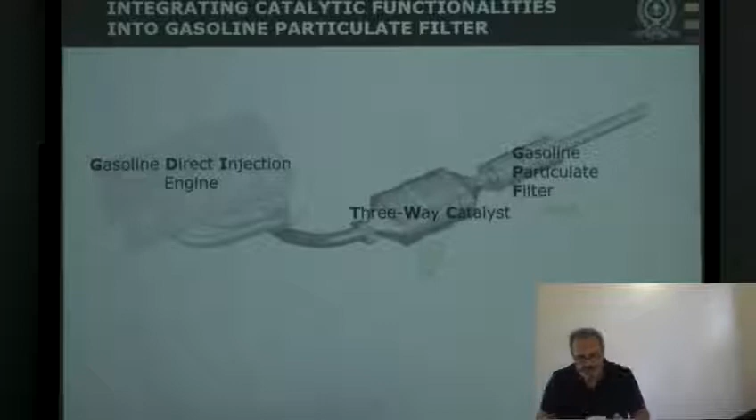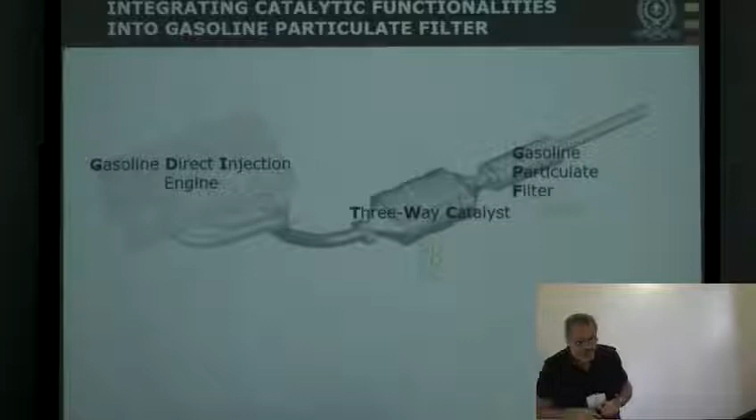The thing that I guess most people don't know, at least I didn't, is that GDI engines produce soot, and they produce soot in greater number than diesel. I said number - if you look in terms of mass, they produce less total mass, but greater number of soot, meaning the particles are even smaller than diesel, in the order of below 100 nanometers. So they are actually more harmful for human and animal health.

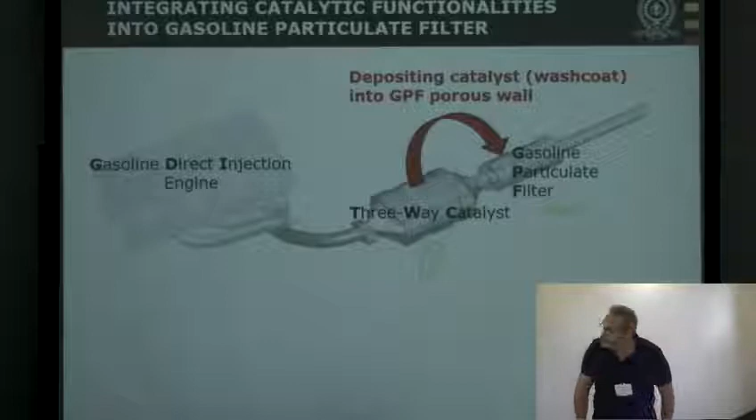So to avoid this, the industry has been designing and putting into the exhaust gas system gasoline particulate filters, like was done for diesel engines. And of course, in front of the gasoline particulate filters, you have the three-way catalyst used to reduce NOx, oxidize CO, and eventually oxidize unburned fuels. But the industry now is trying, for many reasons I'm going to explain, to delocalize the catalysts into the gasoline particulate filters.

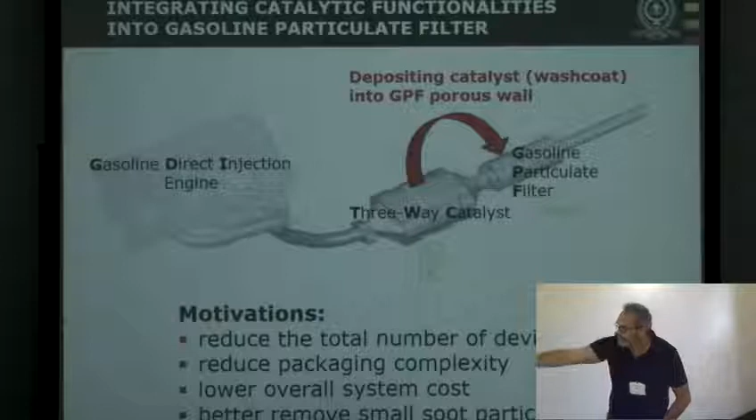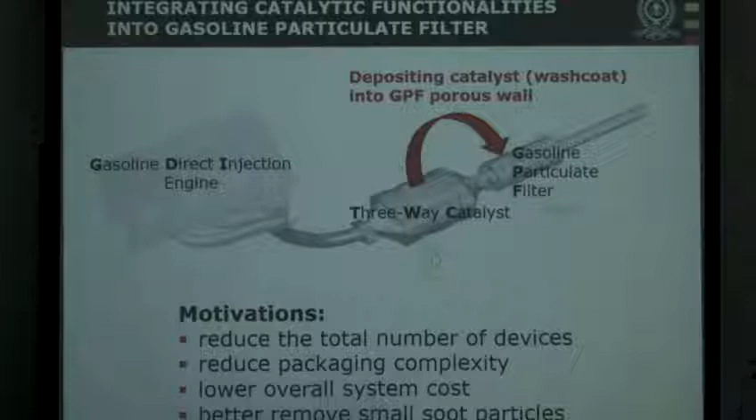So combine the two units for several reasons: reduce the total number of devices in the exhaust after-treatment system, reduce packaging complexity, lower overall system costs, and eventually better remove the small soot particles. That's the context of this work.

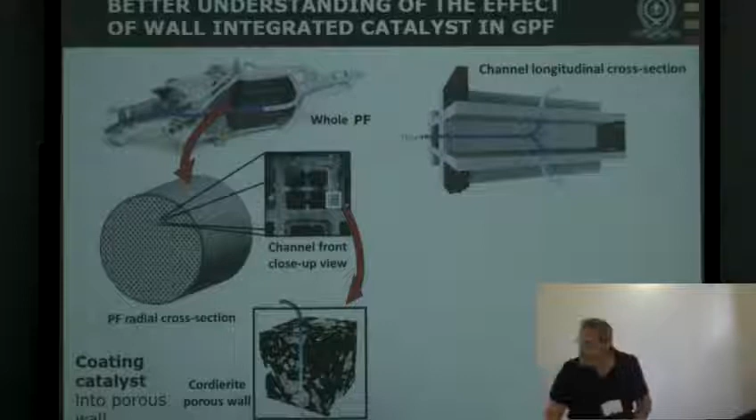We're forcing the flow to go through this cordierite porous wall - cordierite is a ceramic - and the order of magnitude of the pore size of this cordierite is around 20 micrometers, and the thickness of the wall is around 300 micron, to give you an order of magnitude. So the idea is to take the catalyst and embed it into the porous media, the ceramic. But of course they want to do it in the best way possible.

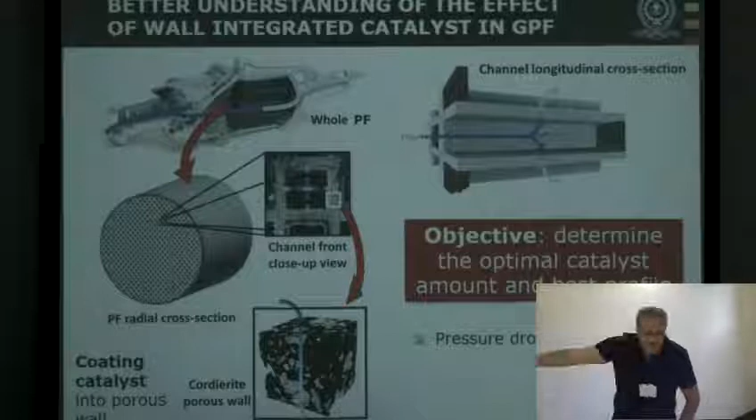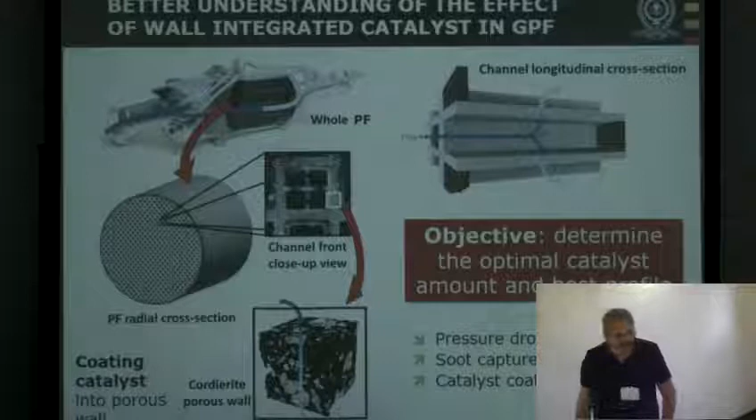So the objectives of Igor's work were to determine the optimal catalyst amount and best distribution within the pore space, to have the lowest pressure drop possible, the best soot capture efficiency, the best catalytic effectiveness, and eventually to reduce cost.

So we devised a four-step numerical methodology for the prediction of the three-way catalyst gasoline particulate filter performance. There are four steps, I'm going to go into detail in the next few slides.

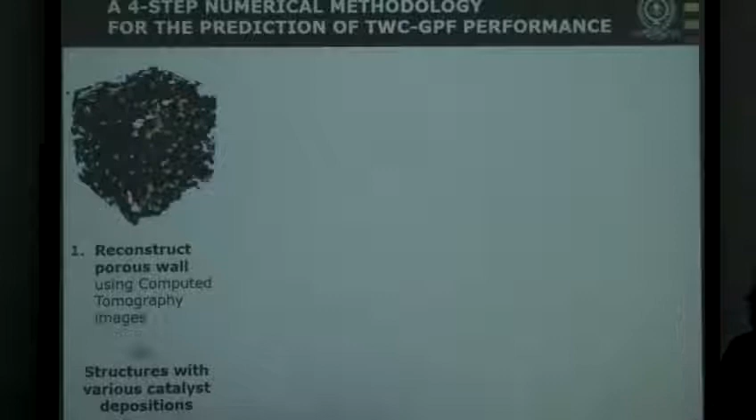So the first step is to reconstruct the porous wall. We're focusing only here - you could think of modeling the entire GPF, but that would be a multi-scale problem, so for the time being we're focusing only on the porous wall, which we reconstruct using computed tomography images.

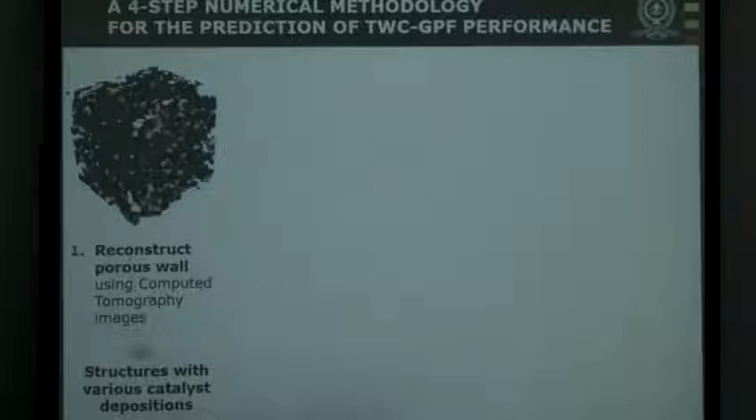The second step is to compute the flow fields using the lattice-Boltzmann method to determine pressure drop or permeability of the porous media. The next step is to compute the aerosol trajectories by solving a Langevin equation to determine the capture efficiency of the porous media.

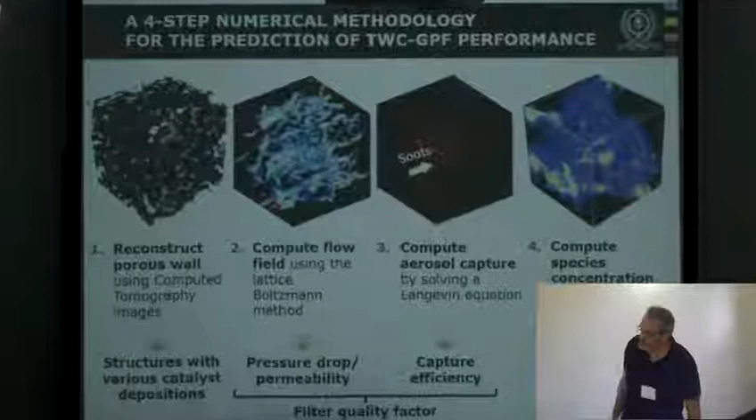And eventually, from the pressure drop and the capture efficiency, you can determine—I'll show you later how this factor is devised—it's a filter quality factor, which is independent of the thickness of the filter. The fourth step now is to compute the concentration of a species within the porous media and determine the catalytic coating effectiveness and/or the conversion of some.

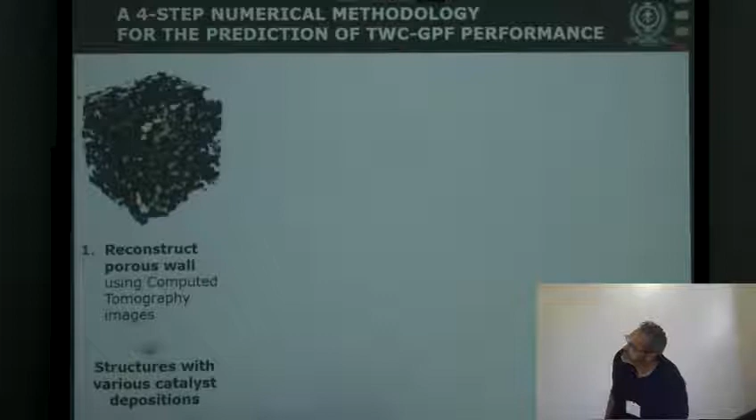So to go into a bit more detail, how do we reconstruct the porous wall? From 2D tomographic images—of course I won't go into details because this as such is the work of a master's thesis or a PhD. We actually have a German guy working on this full time.

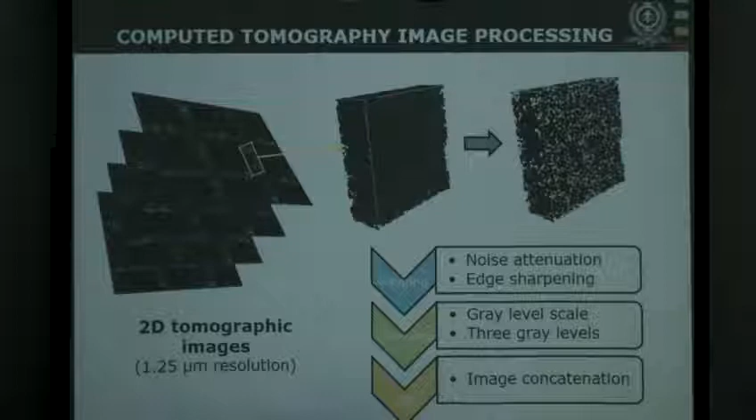So you have to filter the image. The thresholding, as you know, is quite difficult because here we have to threshold three phases: the porous media, the cordierite, and then the catalyst. So this is not—I only have a few slides, just this one on this—but this is such a big endeavor.

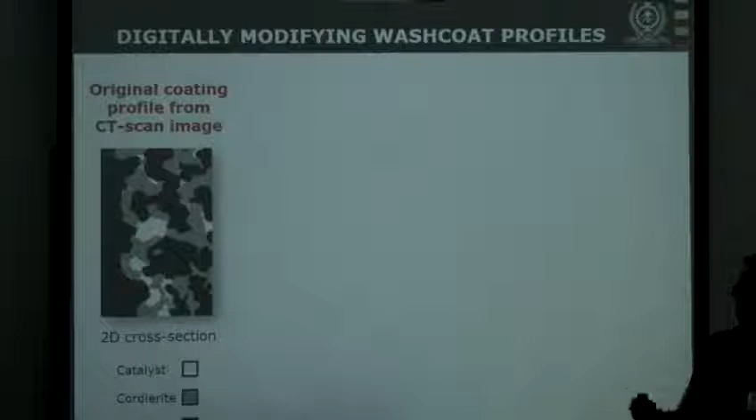Eventually you concatenate the 2D images and you get the 3D structure. So Umicore provided us with some tomographic images of one of the 3-way catalyst GPF converter and filter that they have developed with a certain catalyst deposition inside.

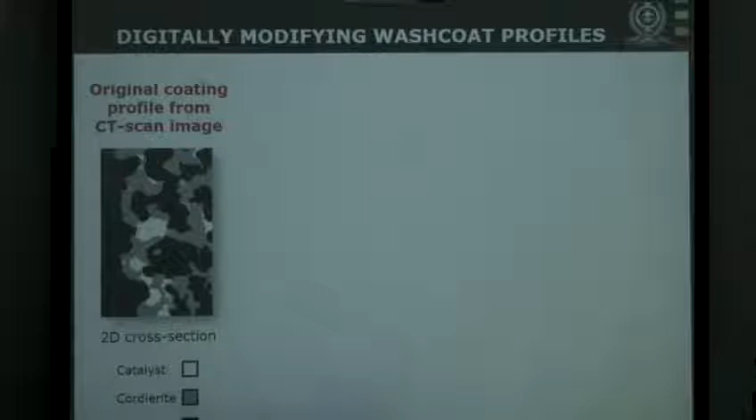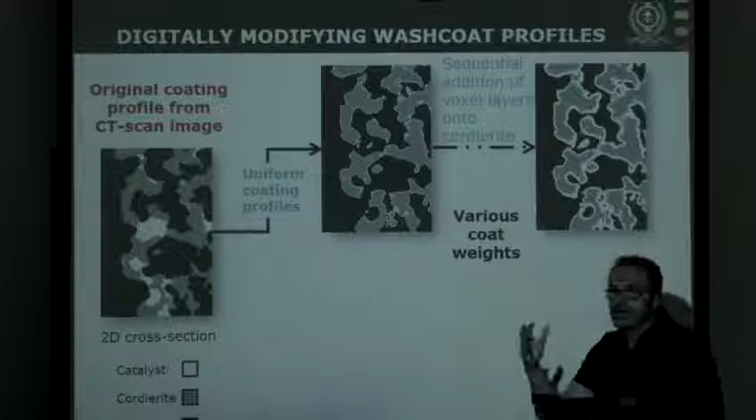And from this image, we are reconstructing several structures where we vary the coat weight, first using a uniform coating deposition, because eventually they wanted to know whether a non-uniform or uniform coating deposition is best to use.

So to deposit uniform coating layers, we simply remove the catalyst here in white, and then we grow layer by layer the catalyst on the cordierite wall, and doing so we can have different coat weights onto the cordierite porous wall.

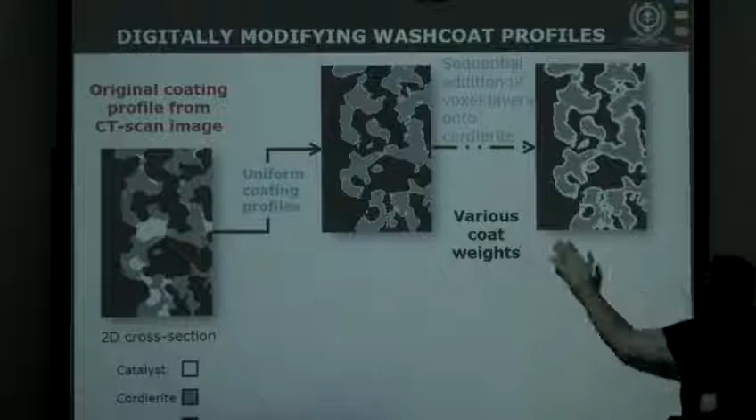The other approach now is to form non-uniform coating profiles at different coat weights. We start from the original image, we erode the catalyst and then we reduce the coat weight, or we dilate the catalyst and increase the coat weight, conserving some kind of non-uniformity in the deposition.

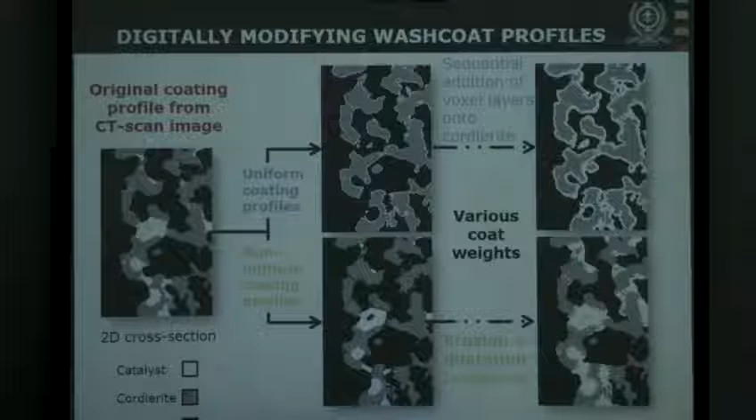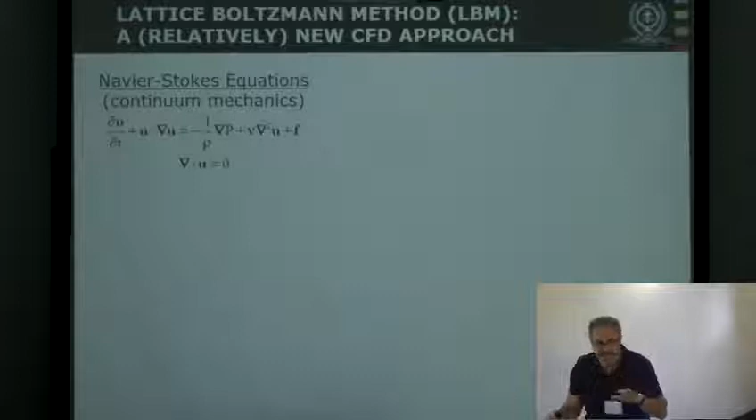So the second step, as I told you, is to compute the fluid flow using the lattice-Boltzmann method. I have this slide just in case some of you may not know exactly the lattice-Boltzmann method. It's relatively—I put it in brackets because it's been around for 20 years—a relatively new CFD approach. Instead of solving the Navier-Stokes equation, you actually start from the Boltzmann equation.

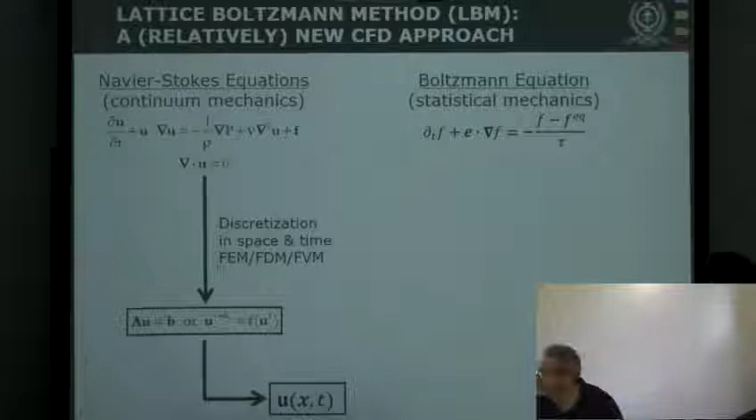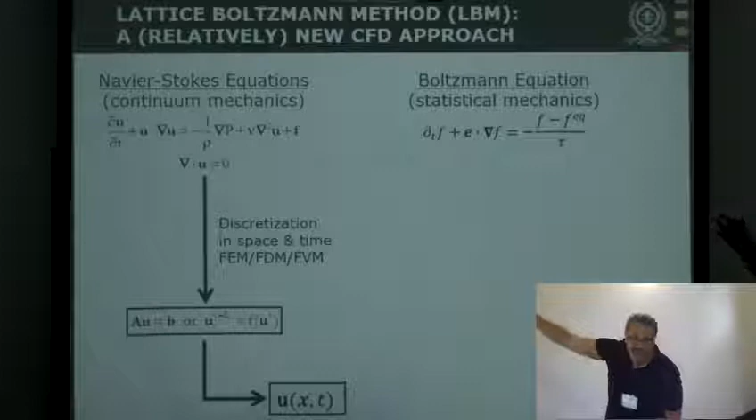Navier-Stokes is a continuum mechanics representation at the macro scale of a gas or fluid. The Boltzmann equation, which was devised for gas, is actually applicable in a certain way for fluids too. It's a statistical mechanics representation of a gas or a fluid, so it's this mesoscale representation.

You start from this Boltzmann equation. Of course, what does this Boltzmann equation involve? It involves F, which are probability distribution functions of finding molecules going in a certain direction from a point in time and space, x and time.

So you discretize this equation—don't want to forget to mention here the collision term. This is the collision term, this is the BGK approximation. We heard about that in several talks. This is a relaxation towards local equilibrium.

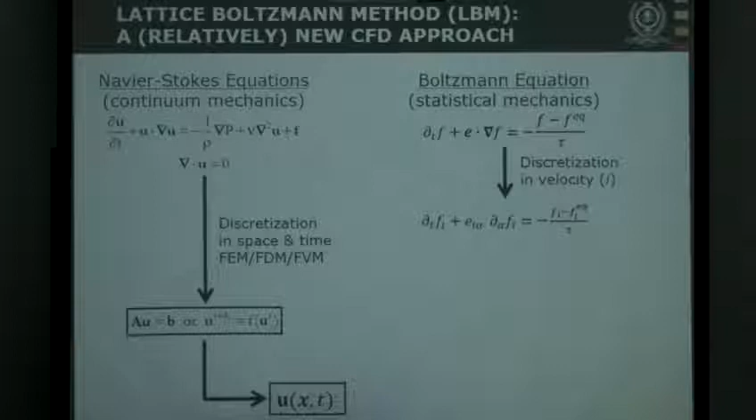And then we discretize this equation in velocity space, so we get the discrete Boltzmann equation. Then you discretize this discretized equation in time and space using the finite difference method, so you get this LBM explicit scheme, which evolves the probability distribution functions of finding particles somewhere in your domain.

And this explicit scheme, of course, has some limitations—the Mach number needs to be relatively low, and the Knudsen number also needs to be relatively low. But by solving for the probability distribution function, in the end you can integrate the probability distribution function in velocity space and recover the density and the momentum, so the velocity. That's the approach of the lattice-Boltzmann method.

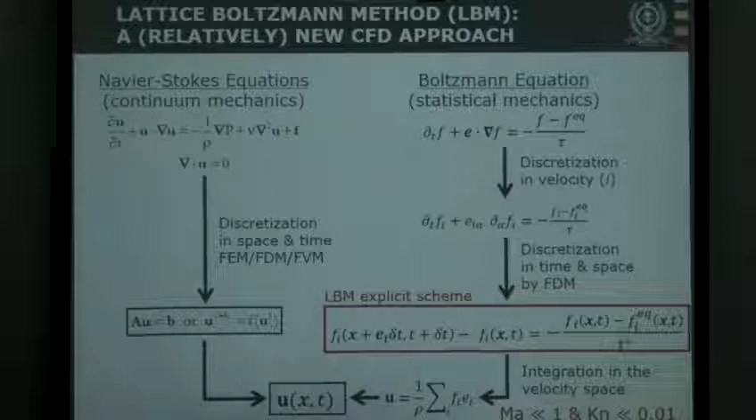And what's neat is that it has an explicit scheme. This means it's more efficient in terms of parallelization, so you can recreate structures that are quite large and parallelize the domain onto computer clusters. The algorithm is also very efficient on CPU and GPU architecture.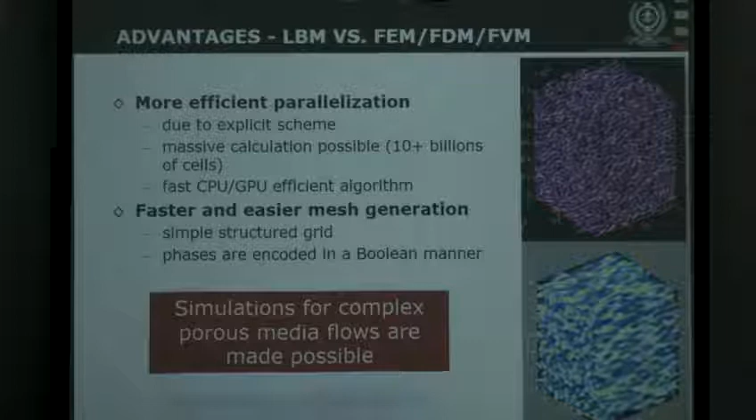Other advantages of lattice-Boltzmann are that you're actually solving this Boltzmann equation on a simple structured grid, so reconstructing any complex domain is quite easy—you just flag cells as being porous or solid, and so the phases are encoded in a Boolean manner. So using this method, we can solve really complex porous media flow.

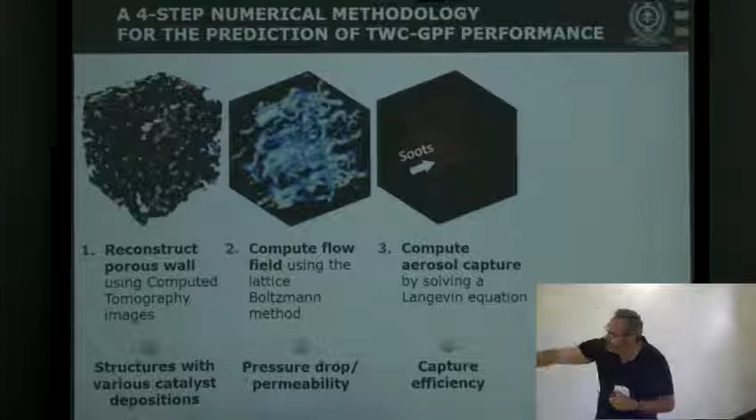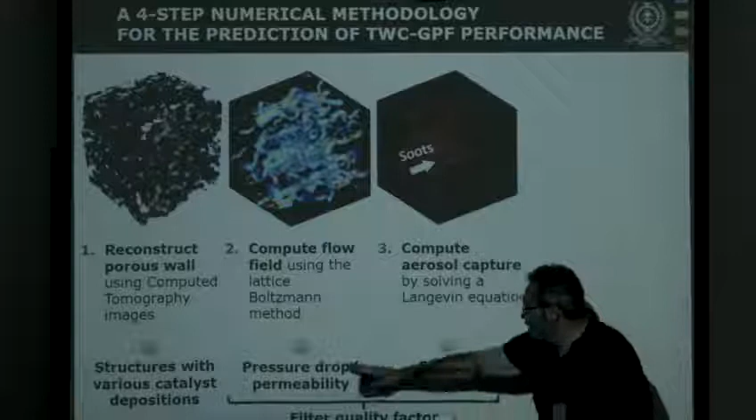So the third step now is to compute. Having the flow field, you can launch aerosol particles at the inlet of the flow field. And by solving a Langevin equation for each of the particles, you can track the trajectories of the particle and compute the capture efficiency.

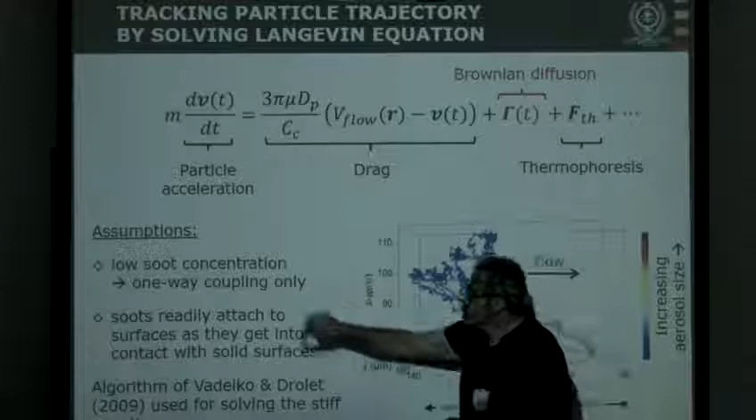And again, having the capture efficiency, you can evaluate the filter quality. To go into more detail, the Langevin equation is Newton's second law of motion with a Brownian diffusion term. If you want, you can even add a thermophoresis term if needed. The big assumption is that since the soot concentration is relatively low, we can use a one-way coupling. So we solve the flow, and there's no coupling between the presence of the aerosols in the flow and the flow itself.

It's a simplification, but it works relatively well. Another assumption is that the soot will readily attach to the solid surface as it touches it. So here you see different colors representing the size of the aerosols, and depending on the size, the dark blue trajectories are much more Brownian than the other colors.

The porous media would be somewhere here, and this is just the entrance of the porous media. So you see that the red one will actually collide right away at the surface of the porous media. Some will penetrate a bit deeper, and some will fluctuate in front of the porous media and eventually collide on the porous media.

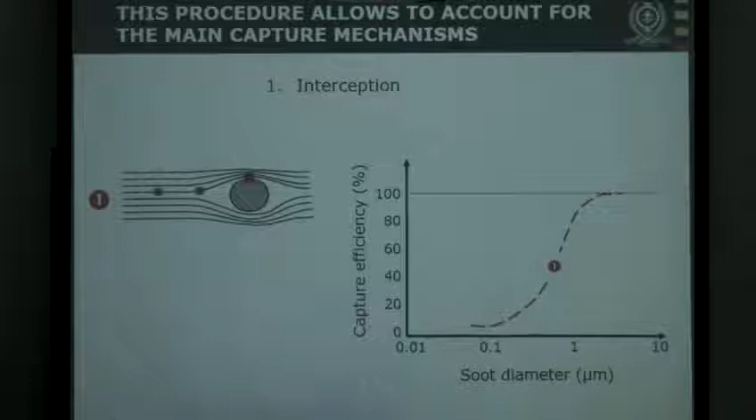So this procedure allows us to account for the main capture mechanisms for aerosol, which are interception. Interception is when the aerosol follows the streamlines, and eventually, because of its discrete size, it collides with the surface of the collector. You also have the inertial impaction term.

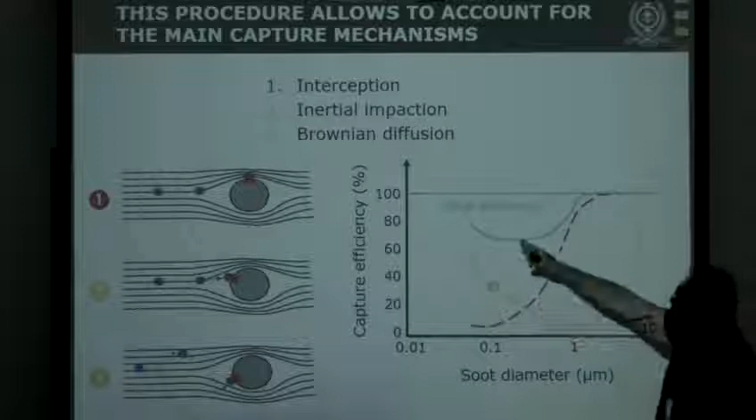Because of inertia, eventually the particles will divert from the streamlines and collide with the collector. And you have the Brownian diffusion term, and the combination of all those terms will give you the total capture efficiency as a function of soot diameter.

So in our study, what I'm going to be reporting is the capture efficiency at what we call the MPPS, the most penetrating particle size, so the worst case scenario.

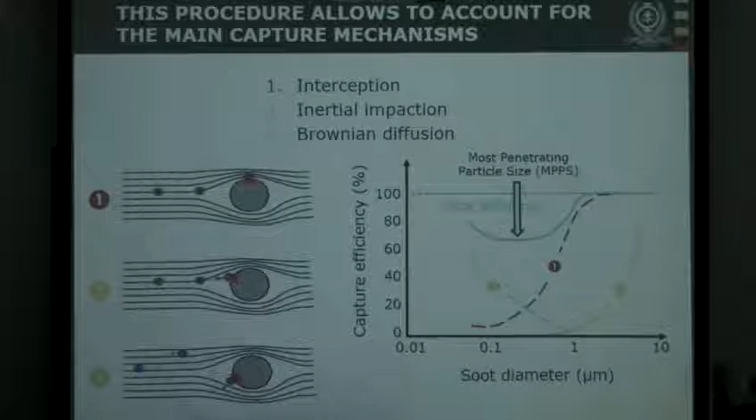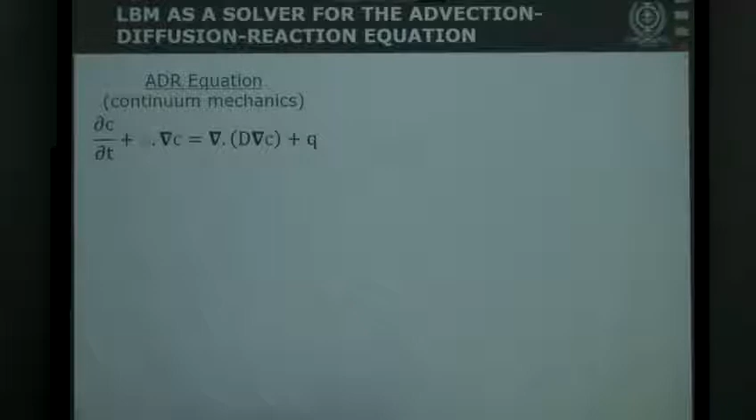So the fourth step is to compute the concentration field of a reactant inside the structure. Here also we use lattice Boltzmann methods. Maybe some people don't know, but the lattice Boltzmann method has come up from CFD, from computing fluid flow, from Navier-Stokes. But actually it's more than this - it's a PDE solver. You can use this lattice Boltzmann approach to actually solve any PDE equation.

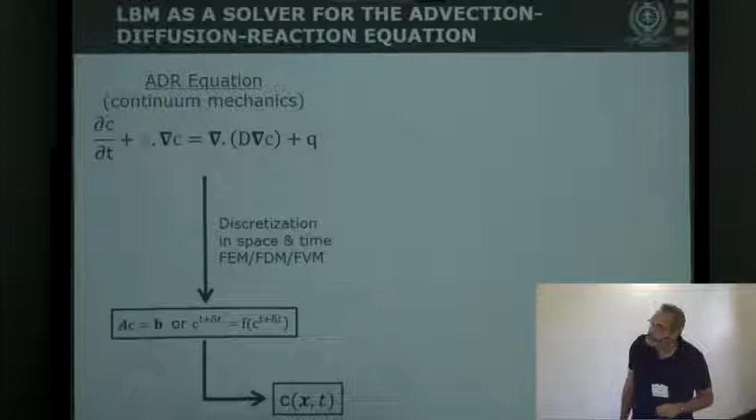And here we use it to solve the advection diffusion reaction equation. In the same way as solving Navier-Stokes, of course you need to adapt the equilibrium function and some of the weights of the method, and you can verify that your approach is actually solving the macroscopic equation by doing a Chapman-Enskog expansion.

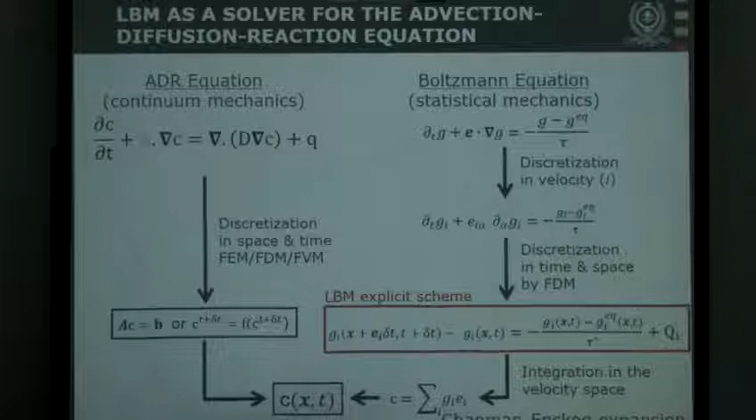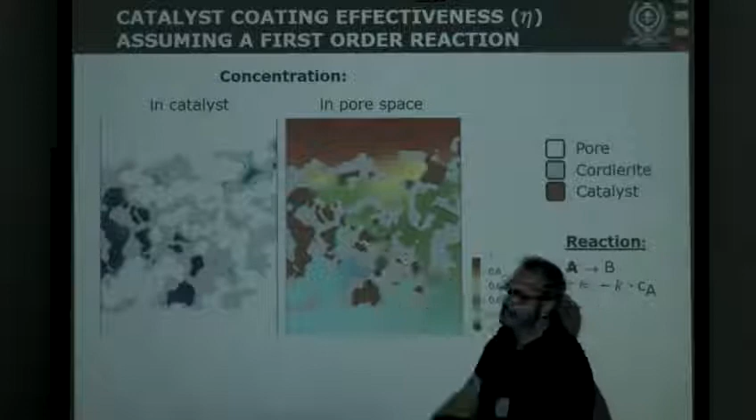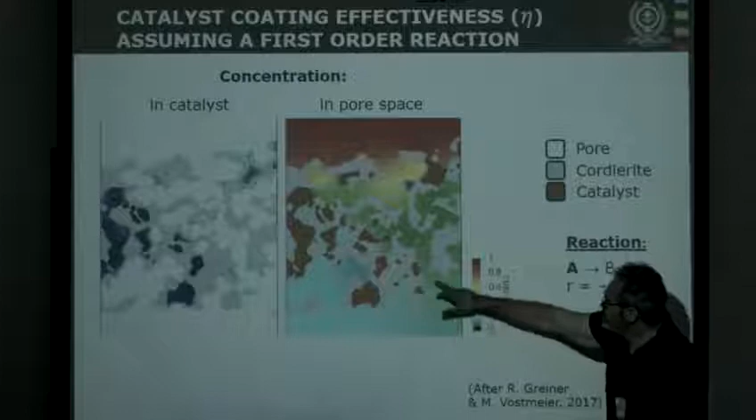So having the flow field, after that you can compute what we call the catalyst coating effectiveness. So here you have the concentration field within the catalyst. The catalyst here in this image is shown in brown, okay? And here you really have the concentration field within the catalyst, and here you have the concentration field within the pore space.

We assume here a first order reaction to devise this catalyst coating effectiveness factor. And to calculate it, we simply average the concentration in the catalyst phase divided by the concentration in the pore space.

So here, let's move on now to the results part. These are some of the numerical conditions that we used. We looked at soot particles in this range. I have to say here, because of the dimension of the geometry, which is quite small, we are in laminar regime. We account for the difference in density of the soot particles depending on their size.

What may sound like a rough approximation is that we consider there is no soot accumulation. If we were to study diesel engines or diesel particulate filters, this would be a rough approximation because eventually the soot would accumulate on top of the porous wall structure. But for the gasoline engine, the temperature of the gas is so hot that the soot is not accumulated on top of the structure for the most part.

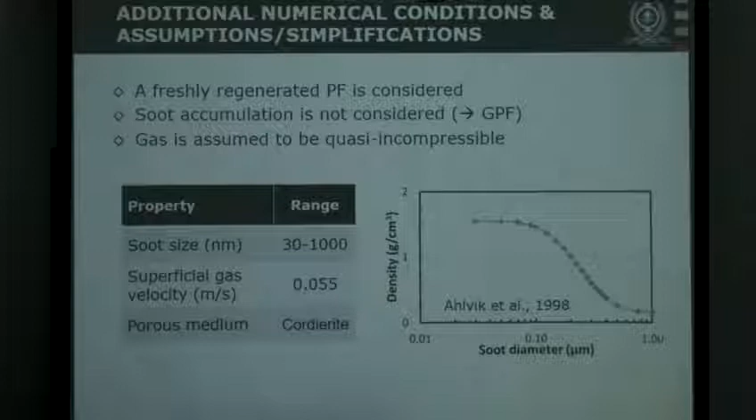So here the gas is assumed to be isothermal, as you said, and also quasi-incompressible.

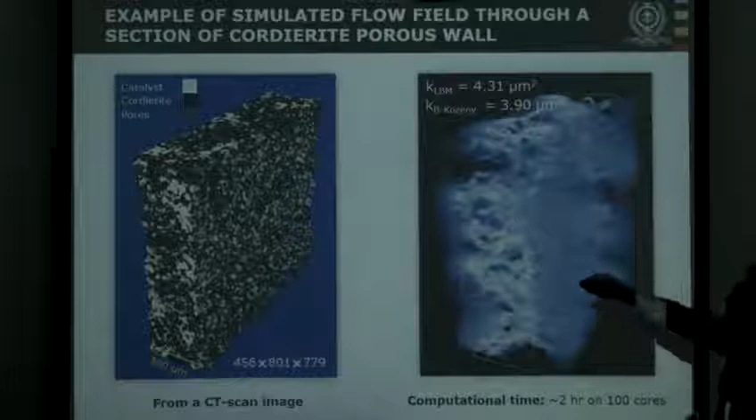So this is an example of simulated flow field in one of the structures that we looked at. You see here the different phases: catalyst, cordierite, and pores. You may see on some of my slides 'wash coat' - wash coat is actually catalyst. You see here the flow fields.

This is the permeability that we have computed from this CFD simulation. If you take the Blake-Kozeny equation, which does not necessarily apply for this kind of structure but applies for spherical packed beds, we find a permeability that is quite close. So that seems to confirm that the code is working properly. And to give you an order of magnitude, it takes roughly 2 hours on 100 cores to simulate this flow field.

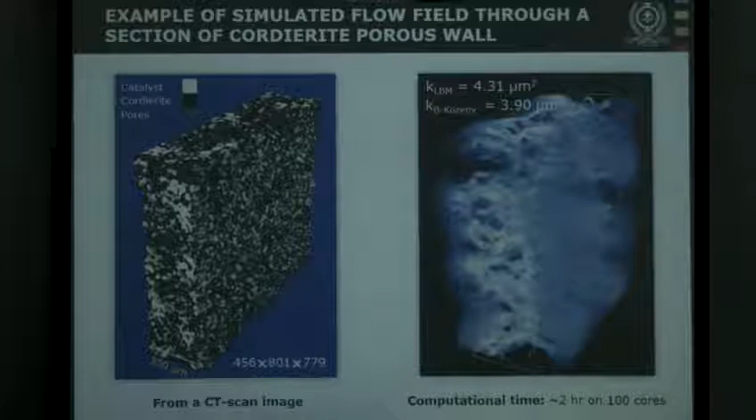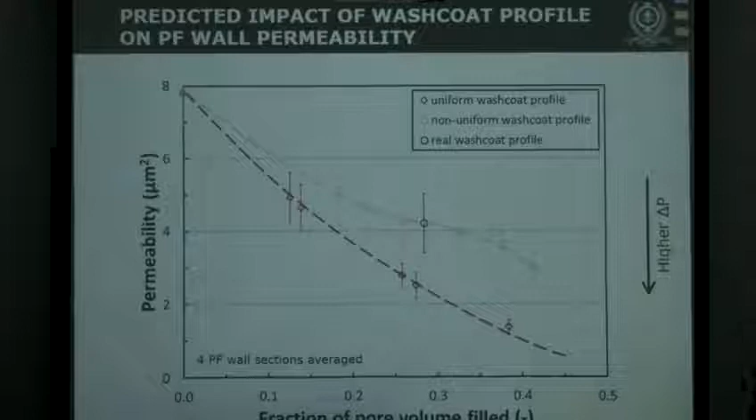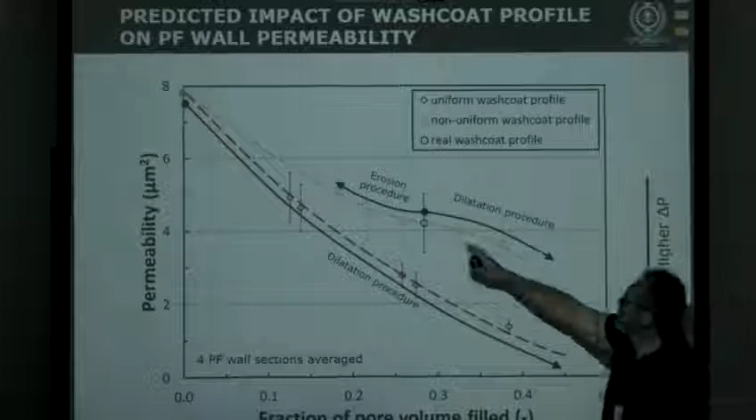For the non-uniform wash coats, you also see a decrease, but it's not as clean. It's monotonical, but this one is a bit quadratic, a bit more complex. You see here the black point - it's not an experimental point, but the simulation for the real porous media, which we took. I recall that from this real structure we dilated or eroded the catalyst layer to create all those structures, same thing here for the uniform profile. So this result as such is not so surprising - permeability is decreasing, but it seems that the non-uniform wash coats get lower pressure drop than the uniform wash coat.

I think we can explain it just by channeling. So channeling allows you to not build too much pressure within the structure, in comparison to the uniform profile.

Now if we look at the capture efficiency at the most penetrating particle size - this is the capture efficiency in percentage, again as function of the fraction of pore volume filled with catalyst - for the uniform profile we have a monotonic increase that we would expect.

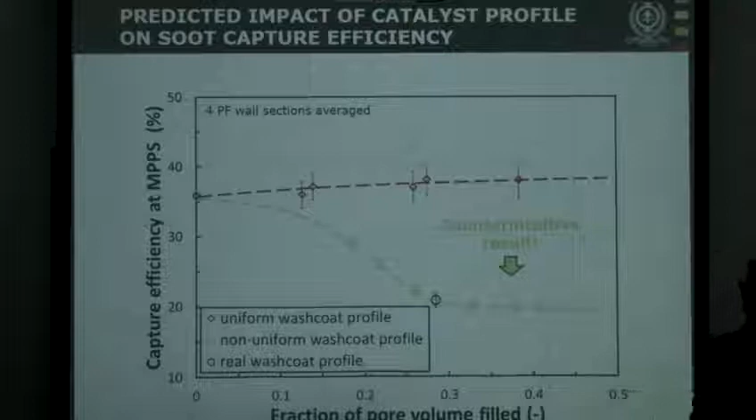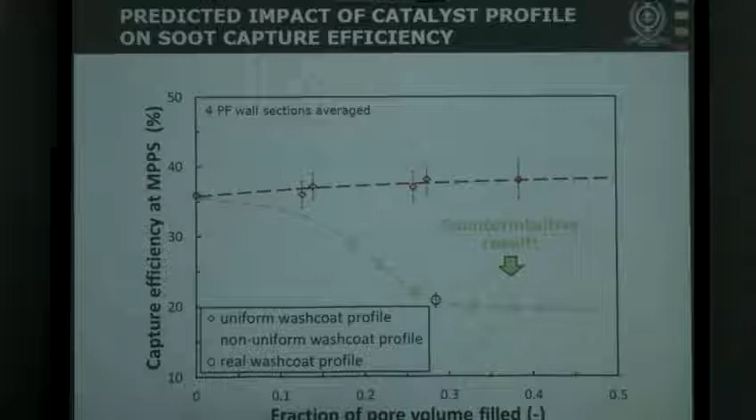And then when Igor brought me this result for the non-uniform profile, I said, are you sure about your calculation? Because this is highly counterintuitive - you fill in the pores with some material and you capture less soot particles. He said, well, I'm sure about this result. So I said, let's go see our industrial partners, but I'm afraid he might be suspicious. When we went into the meeting room and presented this result, he started to smile. I thought: either he believes we are idiots and our simulation is crap, or they have observed that in the lab. Indeed, he was quite happy to see that this is exactly what they observed in the lab. They had no explanation why the efficiency was decreasing as we were filling the pores with more catalyst.

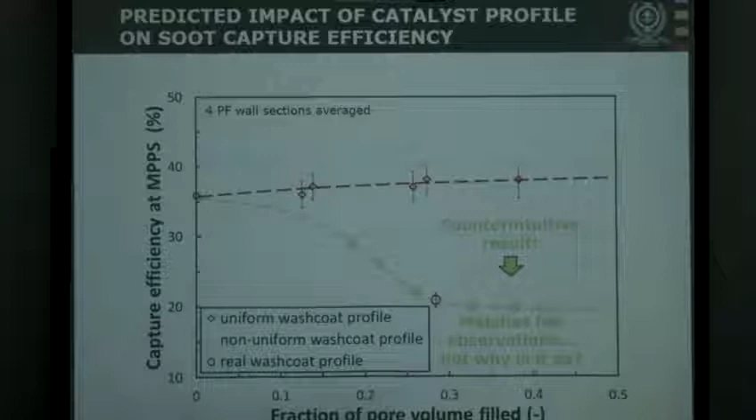So I said to Igor, return to your data, because what's nice with numerical modeling is that you have all kinds of numbers, you can crunch them in many ways. First he showed that interception was the mechanism that was most impacted - somehow the structure was not capturing the soot particles. But in the end, what turns out to be the most effective way to understand what was happening is just looking at the flow field.

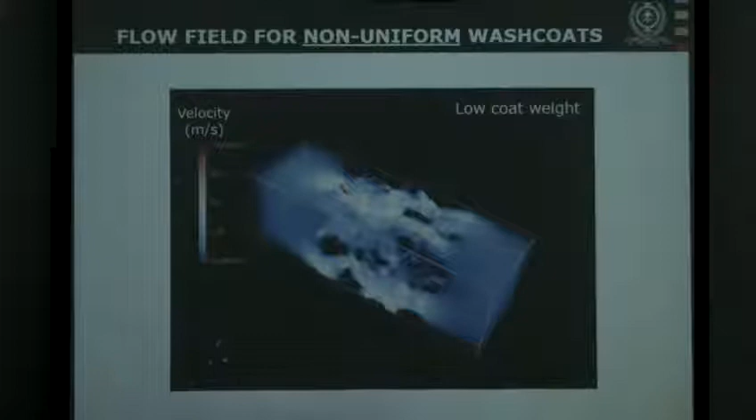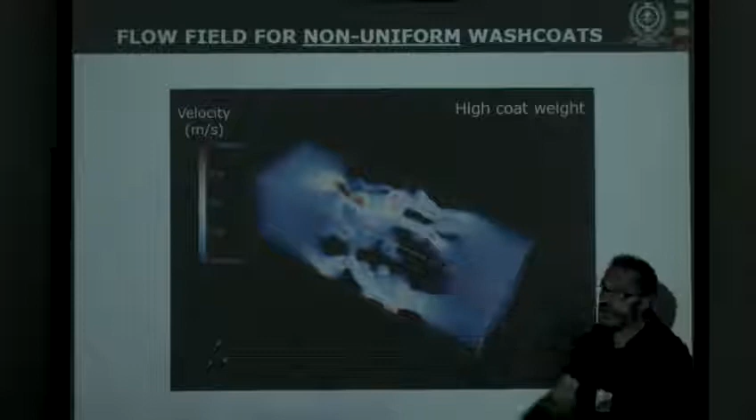That makes sense. When we go to the non-uniform wash coats at low coat weights, it's more or less the same channeling. But what's really interesting is that when you go to high coat weights - and I'm going to go back and forth for you to look - you see that at high coat weights, a lot of small channels have been closed and removed, and they used to participate in the capture efficiency. Most of the flow now goes into large channels, which capture less efficiently than small channels. So in the end, even though you're filling in the pores, since you're filling it non-uniformly, you're closing some small channels, and this decreases the capture efficiency.

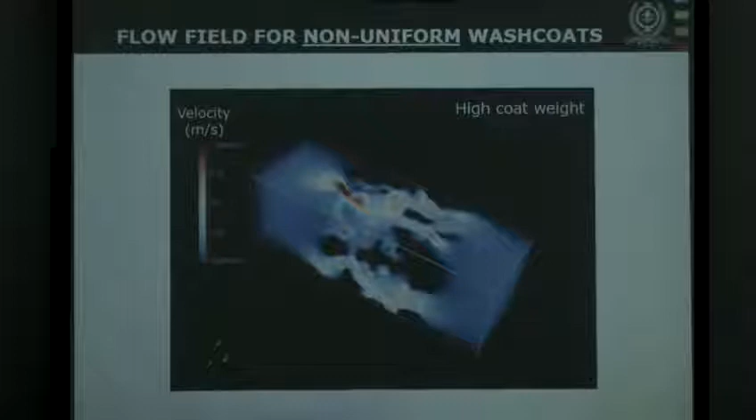You can see it clearly here if we compare the flow fields on the same slide. You see here it's empty.

So having the pressure drop and the capture efficiency, you can calculate the filter quality factor. ln of 1 minus the capture efficiency is proportional to the thickness, and delta P is also proportional to the thickness. So the quality factor is independent of the thickness of the filter. It's an intrinsic material property that tells you the quality of a filter.

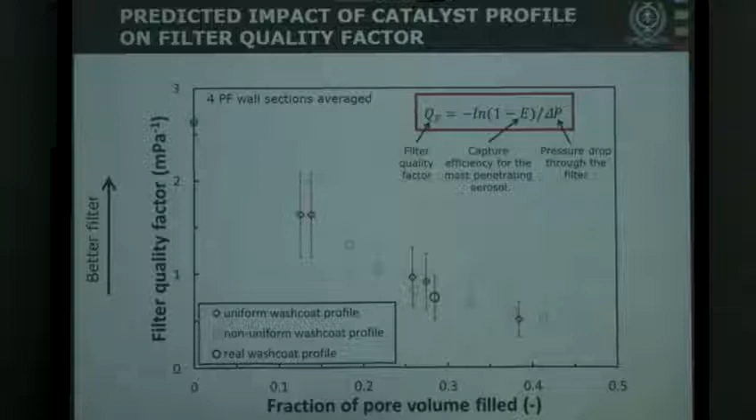If you plot all the profiles we looked at, you basically get some kind of master curve. Although you capture less with non-uniform profile high coat weights, since its pressure drop is lower, everything comes back to the same thing. A non-uniform profile is not less efficient in capturing soot than a uniform one. So for the company, that was quite good news, because getting a uniform profile is very difficult. On the filtering side, this was interesting for them.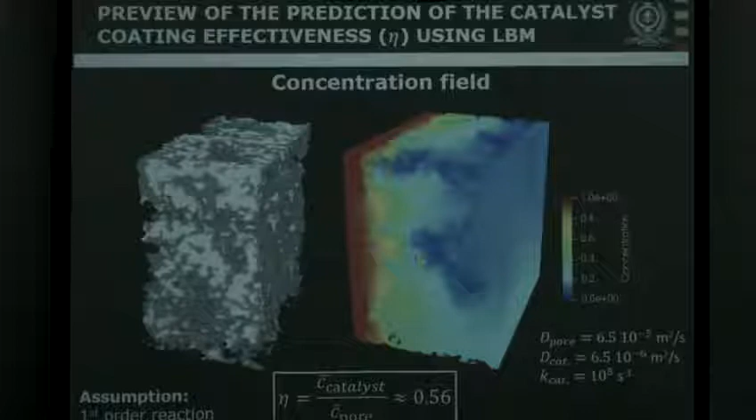You see here the concentration field, and by calculating the concentration in the catalyst layer and in the pore space, you can get some kind of catalyst coating effectiveness factor. He sent me another result looking at some structure, and as we expected, if you have a uniform coating layer, your catalyst conversion should be better than a non-uniform one, and this is what we observe. So even if the non-uniform profile captures soot as well as the uniform one, it performs much less as expected in terms of catalytic conversion.

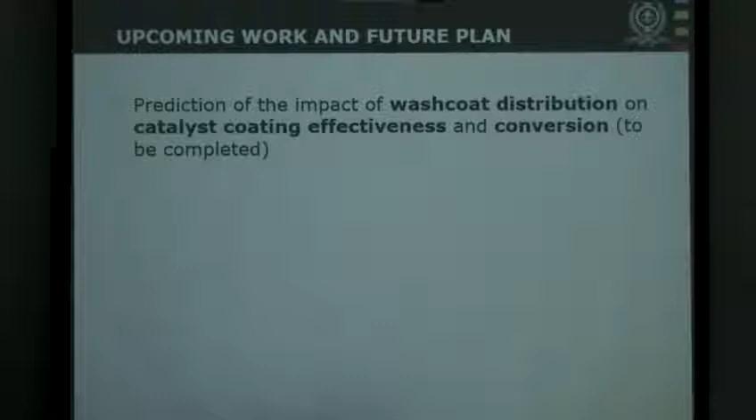So the upcoming work is to finish this part about the effect of the washcoat distribution on the catalyst coating effectiveness and conversion, and to do experimental validation. This part will be done at University of Alberta in Bob Hayes' group, and we'll try to validate the different steps of this model.

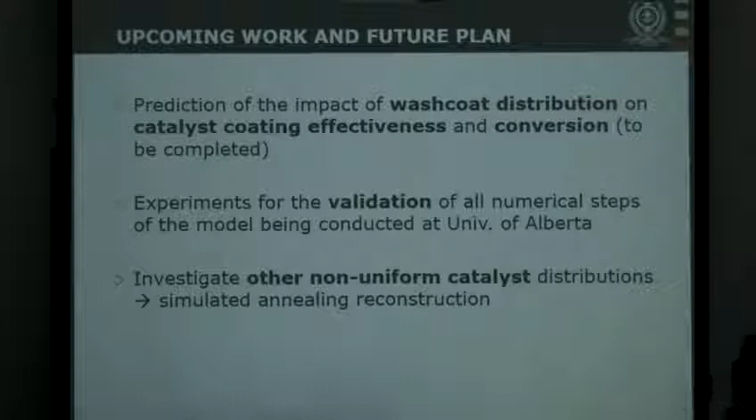In a long-term perspective, we're going to look at other non-uniform catalysts. Here we started from the non-uniform deposition of the real structure, but eventually we may find other distributions of catalyst that might be better. For that, we've already programmed a simulated annealing reconstruction algorithm that allows us to reconstruct all kinds of different catalytic structures inside the particulate filter.

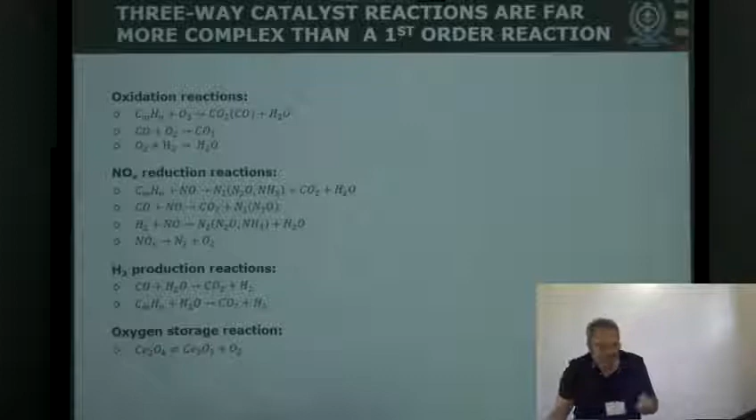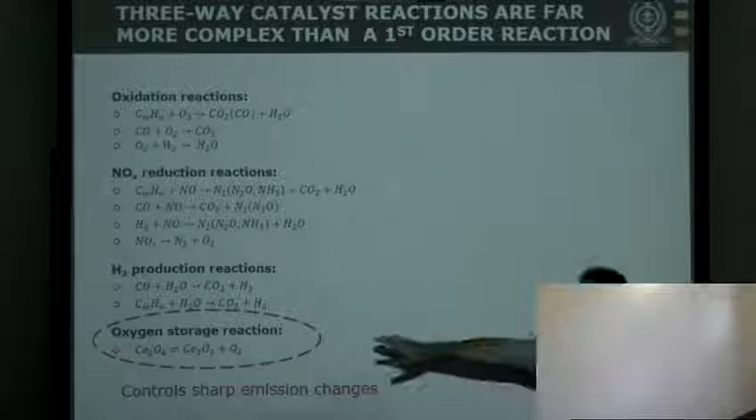And in the end, we want to study the oxygen storage. You see the reaction process taking place - these are only a few of the reactions that can take place in the catalytic converter. There's this reaction called oxygen storage reaction that helps control the sharp emission changes you may have. When you drive and speed up a bit, eventually your fuel is running in the lean regime, so emissions change. This oxygen storage, which uses ceria embedded into the catalyst system, helps control the oxygen inside the system to avoid big changes in emissions. That's another topic very important for the company.

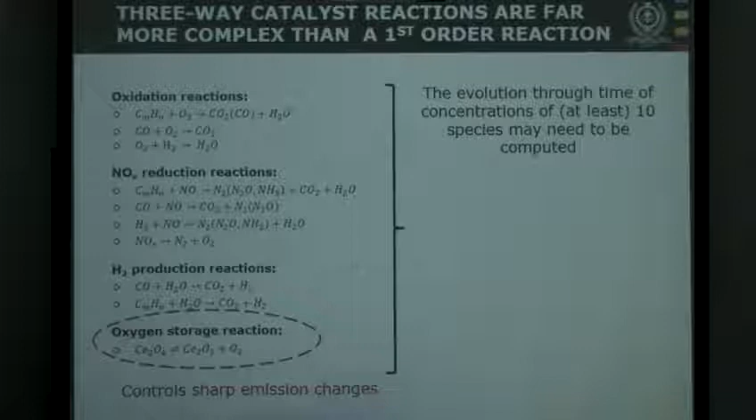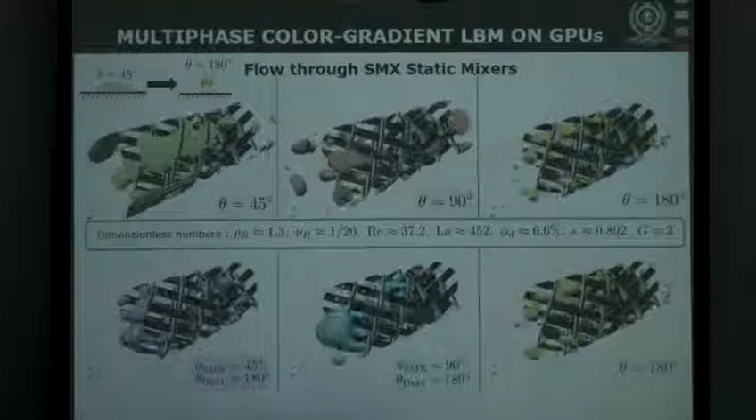So this is biphasic flow - liquid - and we can look at interesting phenomena like contact angle and its impact on the bubble size distribution, as well as the relationship between flow rate and pressure drop. This was actually presented at the North American Mixing Forum last June.

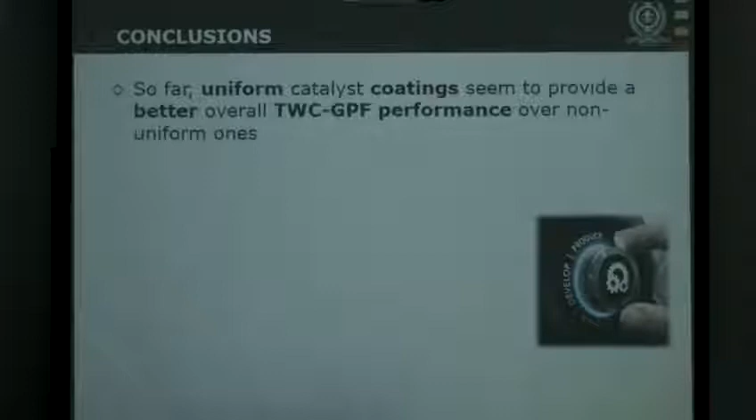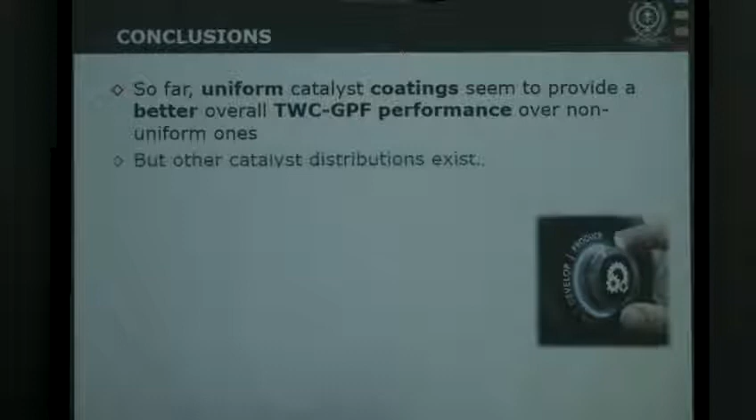So in conclusion, so far uniform catalyst coating seems to provide better overall three-way catalyst gasoline particulate filter performance over non-uniform ones. But other catalyst distributions exist and we're going to investigate that. This is more of a conclusion for industrial people - I think you're all convinced in this room about that. But numerical modeling is a valuable approach that can give insight as to why specific catalyst coatings perform better than others, and provide guidance for particulate filter manufacturers to improve the performance of their gasoline particulate filters.

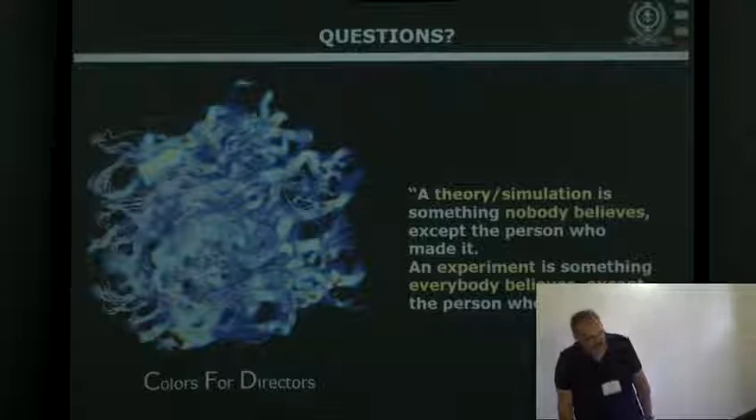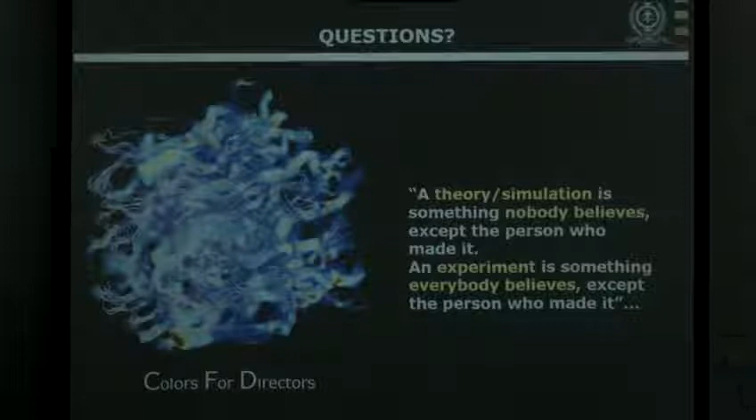This is a flow field in those porous media, and in white, these are the trajectories of the aerosol. So it looked like a painting. Thank you so much.